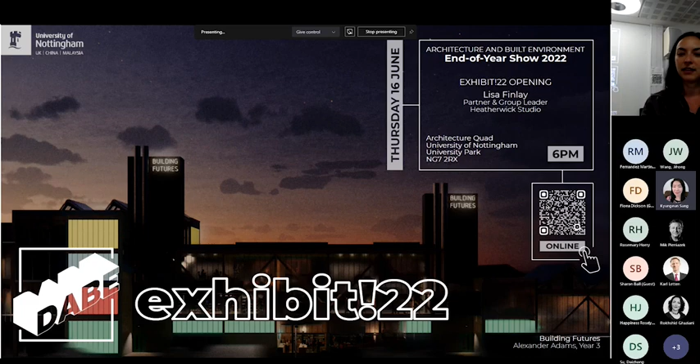Our exhibit for 2022 is online, so if you have a look at the kind of work that the students do—it's very much on city and building level, planning and design. I'm also deputy lead of the University of Nottingham Energy Institute, where that congregates often in energy research that's across the board. So we've just heard a mix of social science and technical backgrounds. The Energy Institute brings it all together to try to tackle the issues we face with energy, and particularly the aspect I work on is cities—the link between mobility and cities, energy systems, and the built environment. So that's me and my background.

I'll talk a little bit about the work involved here, but obviously it's not done just by myself, so bear that with me.

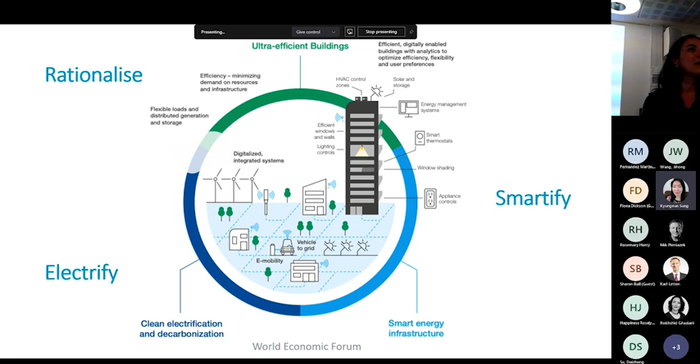I borrowed this graph from the World Economic Forum just to give some headings to the kind of work we do, because when we talk about decarbonizing cities, there's so much that could be done—everything we discussed today covers so many different subjects and areas. But very much we work on looking at ultra-efficient buildings, electrification, and smart infrastructure. So I made up some words there, but I think you know what I mean: rationalize, electrify, and smartify. Those are three areas that really summarize the kind of work we do to decarbonize cities.

So I'm going to start by giving you a couple of examples of the work on rationalizing. Based in Nottingham, as you heard, Nottingham was the first city to commit to carbon neutrality, with one of the earliest targets, 2028, which is really kind of tomorrow, isn't it?

The city took that ambitious approach because in the previous decade, 2010 to 2020, it achieved all its goals—which wasn't net zero carbon yet, but a significant reduction—6 years ahead of time. So the city thought, well, we can do this. But of course, a lot of the easy wins have already been won, and now we're into the difficult wins, which is where most of us are really, across the board—those little things.

So one of the hard wins is the housing stock, the existing buildings. Nottingham has about 164,000 homes, and 61% of those are below an EPC level of C—I think you're familiar with EPC levels, the colorful grading, so anything that's not green is bad, and there's a lot of not green. We assume on average each home would be releasing about 6 tons of carbon, which is the UK average for those properties.

We committed as a nation to bring all homes to EPC level C by 2030. I always smile when I say this because I live in a Victorian house—it's not going to be anywhere near C anytime soon, unless the government really wants to fund this with seriousness. If you have a privately owned property, you're very unlikely to get access to anything that helps you. Maybe some of you are in that situation too.

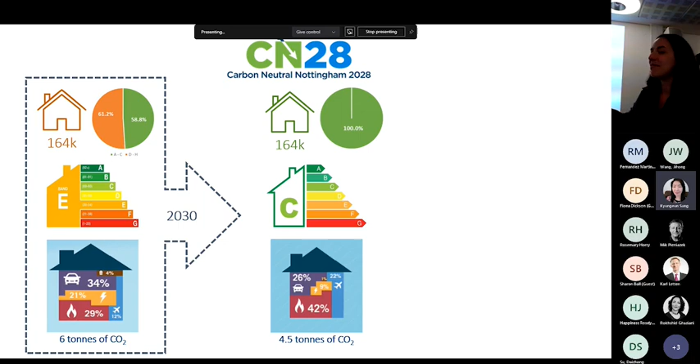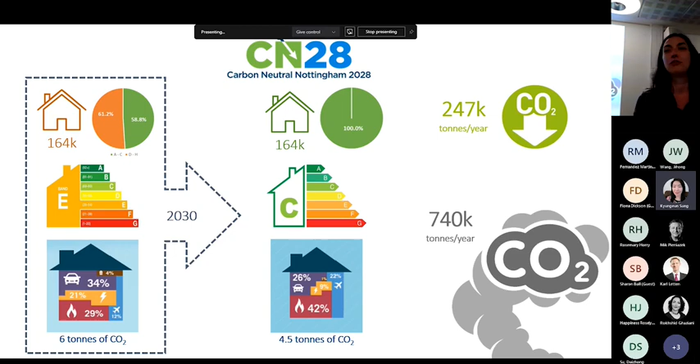Then perhaps the average tons per home will be about 4.5, bringing us to a total of about 740,000 tons of carbon per year, just from the existing housing stock, not the houses being built today, tomorrow, and next year, which are still being built to the previous building regulations, crazy as it sounds, even though new building regulations are coming up to be implemented by 2025, but which still isn't net zero carbon anyway. It's a crazy world, the built environment.

That's equivalent to about 740,000 hot air balloons, or about 74,000 hectares of trees, depending on what kind of tree you plant, and bearing in mind trees take 20 years - you'll hear from an ecologist later - to really start absorbing carbon. 74,000 hectares is 10 times the size of the city of Nottingham in area. That's for one year, just for the housing stock. There's no chance we can offset this.

There is a lot of work to be done on rationalizing, which is that first aspect I was talking about. So currently I'm running a project funded by the community renewal fund. Central government has given some local authorities money to run particular beneficial projects. Mine is one of four in Nottingham, looking at a carbon cost retrofit roadmap - retrofit strategies, the cost of each strategy, the feasibility of those strategies, and the payback both financially and in carbon terms, including the embodied carbon of the retrofit strategies.

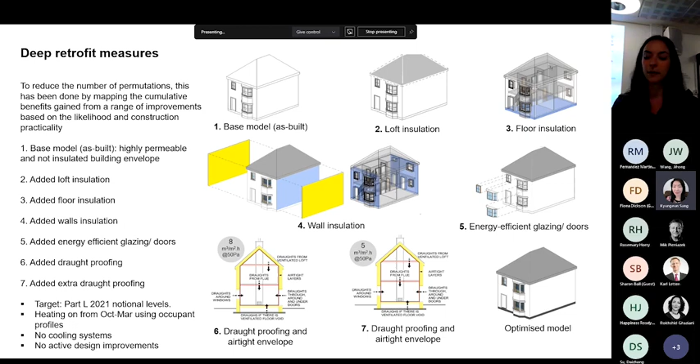It's a rather complex task. To give you a flavor of what that means: once a house is built, we start with the easiest things we typically do - loft insulation, floor insulation, possibly together since you normally get the same contractor. Then we think about wall insulation and windows. Then draught proofing to make it tight before thinking about renewables - air source heat pumps, PVs, and so on. That's the kind of thinking, and that's a flavor of how the outcomes look.

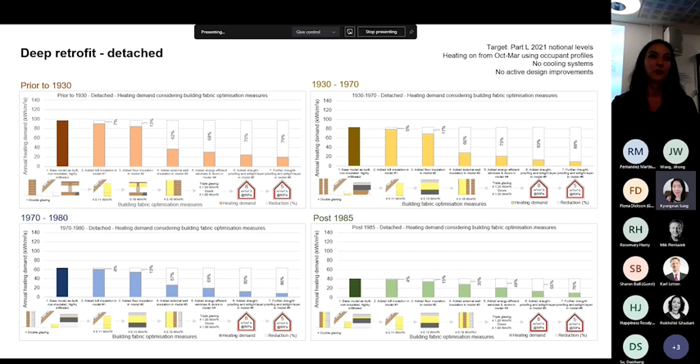The houses are separated by age and by fabric type. We looked at all the housing stock and tried to cover about 80% of it within our studies, then ran particular case studies significant to Nottingham - some of the tall towers will have to be retrofitted, and so on. You can see each retrofit strategy in each column. The graph on the top left shows homes built prior to the 1930s, then 1930s-1970s, 70-80, and post-85. Those time brackets mark significant changes in building regulations, so building fabrics are similar within those periods.

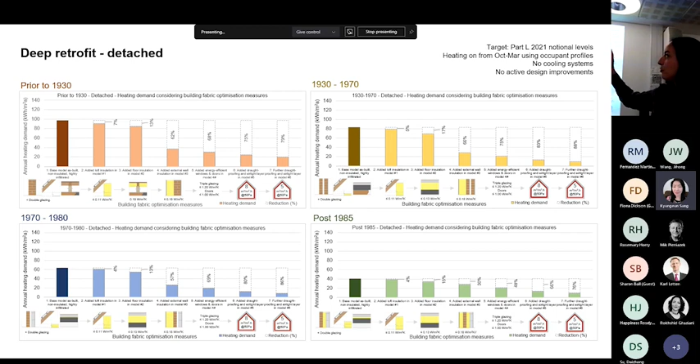So you can actually have a significant impact. If you're doing a deep retrofit - trying to achieve passive house type levels, really energy efficient homes - maybe a Victorian home like mine could get 79% reduction now in terms of energy use for annual heating demand, which is the majority of the energy use there. The newest homes are a much smaller proportion of the big picture, but it could still make a significant change.

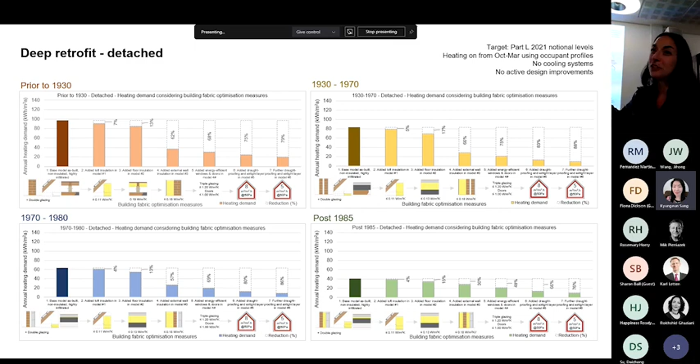However, I mentioned feasibility. A lot of what we're doing here is looking at what happens in real life. In real life, you would not retrofit 1980s homes - very likely you might do a little bit of something, but you're not going to make a full investment in energy efficiency in a home that's already fairly new. So typically that doesn't happen.

In older homes, some stages don't happen either. For example, retrofitting a Victorian house's floors - if it has one, you usually have about a third of the floor as suspended floor that you can insulate quite easily, but the rest goes directly into the ground, so that kind of thing doesn't happen either. Or externally insulating a home that has a cavity wall - you insulate the cavity, but extra insulation on the outside mostly isn't going to happen.

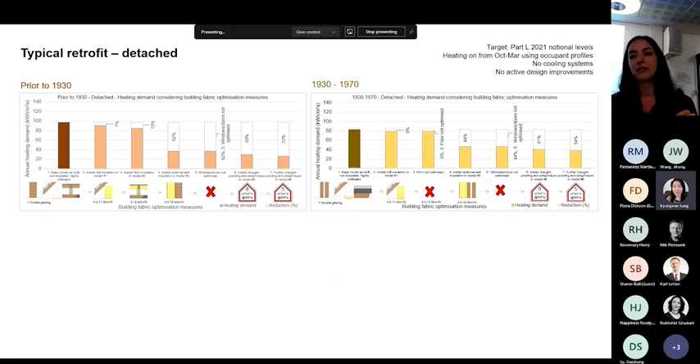So we're really looking at the feasibility of those strategies, and then the cost of each. Even though the government is talking about giving £5,000 per home to make homes more energy efficient, the cost we've observed so far - based on real life, not assessment - is about £70,000 on average to retrofit a social home, which is a very small property, and typically probably costs about that much to build in the first place.

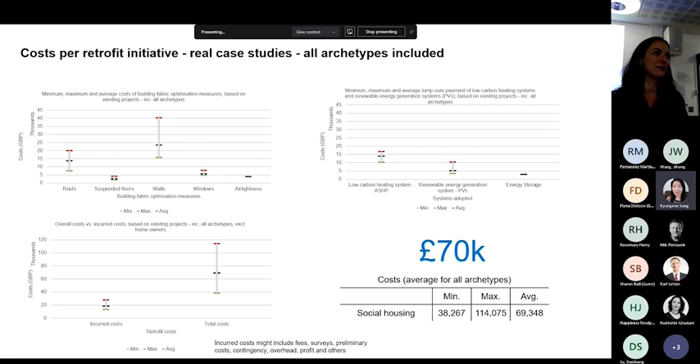And that's the cost of retrofitting on average. For a private home, it's at least £85,000, but there's a lot less data on privately owned properties, particularly with deep retrofit, because I don't know of many. In fact, I know of a couple, but not many in Nottingham either.

Then we looked at the benefits from a carbon perspective. The darker color is using gas for heating the home, and the lighter color is using an air source heat pump with a system efficiency of 3.35, a quite typical unit. You can see you save a significant amount of carbon by using electricity rather than gas, which is what we're looking to do now as we decarbonize electricity. So it's an easy thing to tap into.

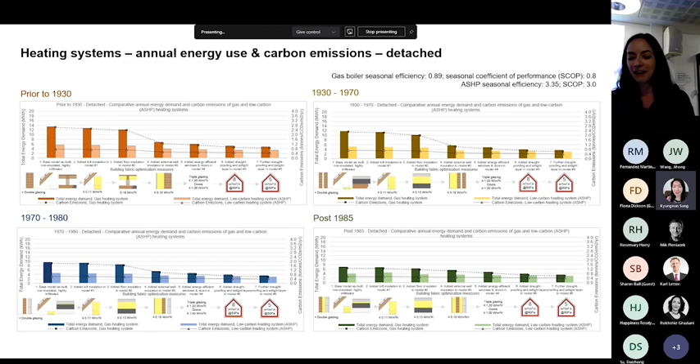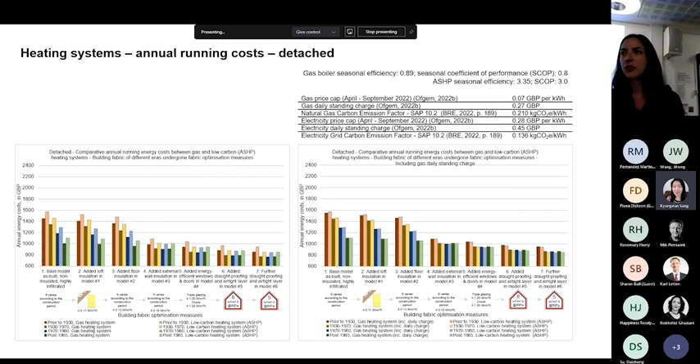However, when you look at the cost, and get into that area of electrification, it's actually going to cost a lot more to heat a home with electricity currently. The graph on the left doesn't take the gas standing daily charge into account, and on the right it does. So on the right you're about the same cost using electricity, while on the left you're paying a lot more. Also, heat pumps tend to run at low temperature, so if you have a really inefficient house, you're probably going to be uncomfortable anyway.

So this is hopefully going to help inform the government on some of the movements and investment in retrofitting existing buildings and homes in particular, because there's a lot of misunderstanding.

The reports commissioned by the government across the country talk about a full deep retrofit for about £15,000, with PVs for about £22,000 per home. If that was the real cost, we would have done it already. Everyone would have done it.

So I got into electrifying heat, which is one of the biggest swings we're going to see in the zero carbon agenda. How many minutes have I got?

Good, then. But there are other areas of electrification we need to look at. As we decarbonize electricity, we try to move more things onto that bracket. So we've been looking at combining mobility with the built environment and the energy system. I very much work in that middle ground.

This is one of the projects we've been running that's just finalized, called EV-elocity, looking at vehicle to grid, vehicle to building, or vehicle to X—vehicle to anything—charging and discharging. Essentially, this is bidirectional charging.

The thinking is, if you have a building producing and generating electricity, as most will have to do in the near future, why would you purchase a new battery for it if you already have to purchase an electric car? That's a battery—a really big asset. It's probably the most expensive part of your vehicle anyway.

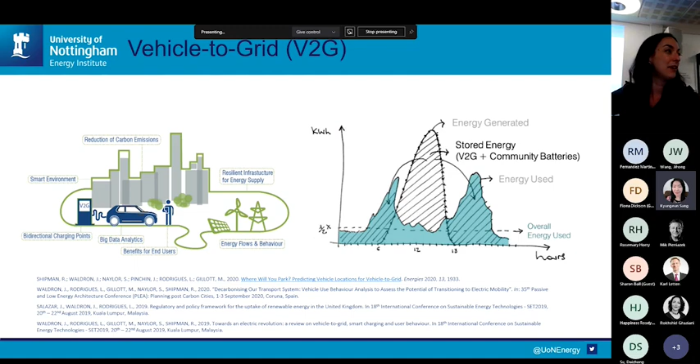If you can be clever about how to charge and discharge that, you can increase the financial benefits by sending energy to the grid, while also significantly reducing carbon emissions. Essentially, this project is about matching the demand for energy with the availability of charging from electric vehicles through bidirectional charging, and we installed a few of those across the board.

We have two at the University of Nottingham, and a few in Loughborough, Leeds, Worcestershire, and Warwick, which was one of the partners, with some battery work done in Warwick.

So you can see, this is my office there. That little house is a passive house, an operational zero carbon house that produces a lot more electricity than it needs. That electricity can go either to power the homes around it, the neighbors, or to power the car.

Our car is actually part of the study, so we drive on sunshine most days—we just charge on excess renewable energy, and that's all we use. So the thinking is, if we program when we park and plug it in, all it needs to know is when I want it to be charged.

The intelligence behind the system will think, actually at this moment in time you're better discharging because there's lots of demand, or at this moment you're better charging or storing and waiting until 2 in the morning.

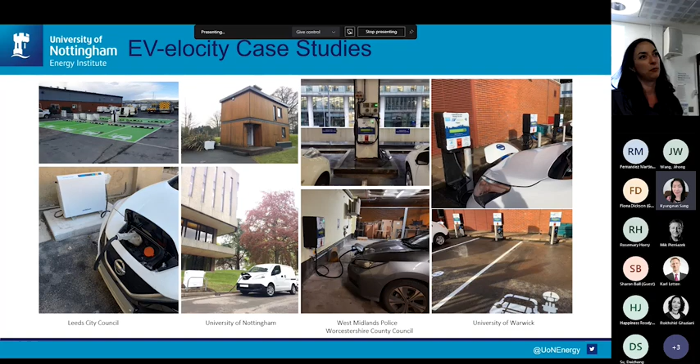Some fleets are really difficult to electrify, and that's not just the case at the University of Nottingham but everywhere. If you have home delivery services, for example, you don't want to interrupt your service in order to charge your vehicle. Or if you have a security fleet, you might be running constantly and need to be ready anytime to go out and reach people.

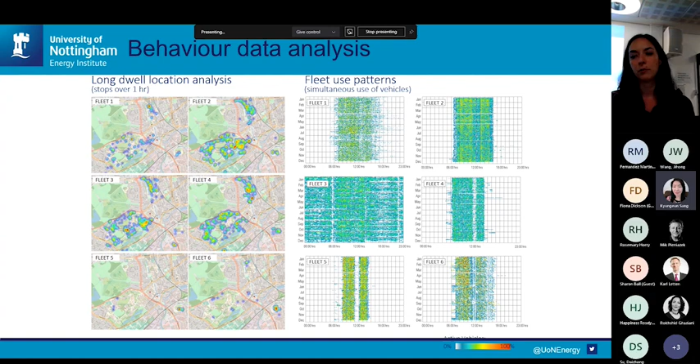This work really told us where we could optimize and where we had opportunities to charge and discharge vehicles. There's a lot of intelligence and machine learning behind this—not by me, because I'm not the intelligent one, but by the very clever people we hire.

You combine vehicle availability, meaning the needs of the users, with the battery state of charge and where it needs to be. Then the building energy consumption and production, and then you look at carbon emissions—the carbon intensity of the grid at those particular moments in time.

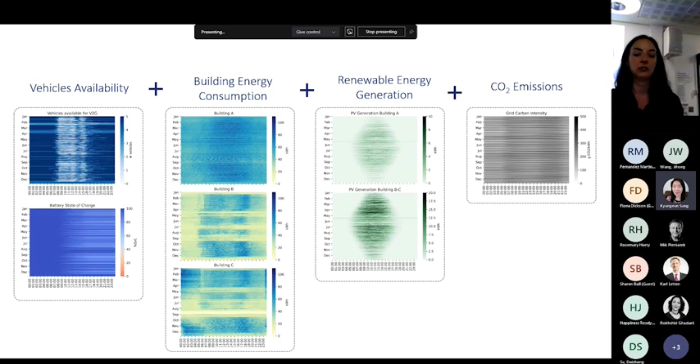By mixing all that together, you come up with something like this, that of course the user doesn't need to understand—the user just needs to plug it in. But the machine needs to understand that for this period of time, the vehicle is likely to be available for charging or discharging, so is it better to charge at this moment or discharge?

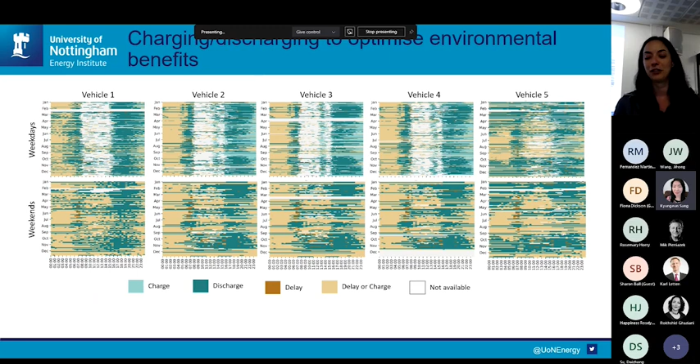We ask those questions based on, in this case, environmental benefits—I want to save the most carbon, so should I charge or discharge, and at what time should that happen? Or alternatively, I should save the most money. You just get those answers based on your need.

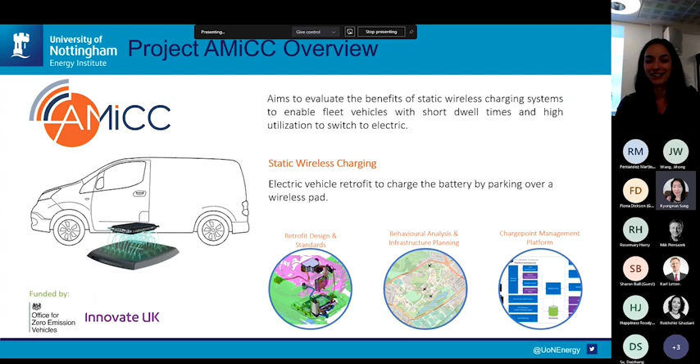Another similar project, but this time looking at wireless charging devices—quite new technology, quite a nightmare to get ready, installed and running. Probably the biggest part of the project was actually getting it on the ground.

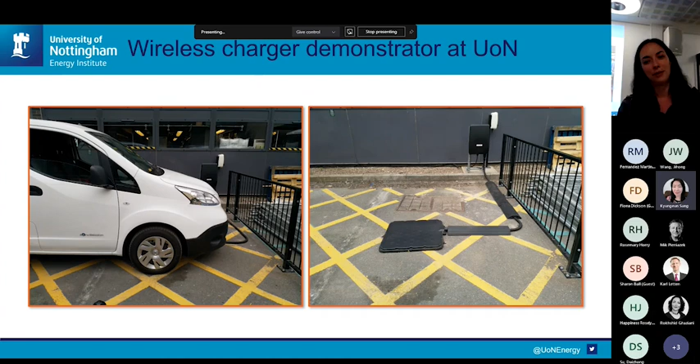Here is the University of Nottingham, and that's as sexy a picture as I could get of this—done by professionals as well, it's a hard one to make sexy. But the interesting thing is actually being able to deal with some of the fleets or vehicles that either have difficult accessibility or only have very small periods of time to charge and discharge—for example, when loading and unloading, or taxi ranks that are constantly moving a little bit further.

At the center of this there's again a lot of machine learning and algorithm development, to get all those different variables and put them together to answer the questions we need answering.

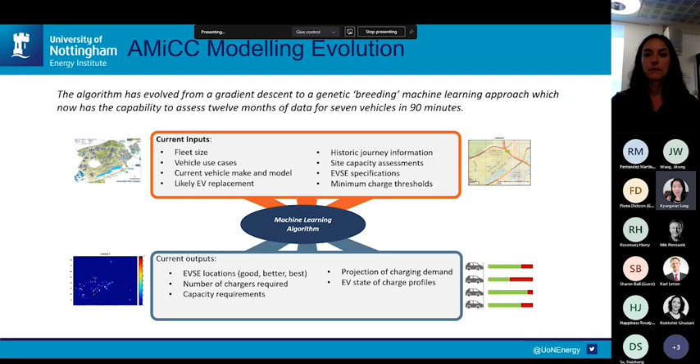That brings me to the next bit, which is where I'll finish, looking at smartifying. I appreciate that's not a word in English, but I think it should be—English isn't my first language anyway, so I'm fine with making them up.

By smartifying, I mean understanding and collecting data that allows us to understand what the problems are, what data we lack that we could collect more of, being able to install monitoring control systems, and being able to tell people what's best to do. For example, on campus, being able to tell someone that if they walk, it'll take that much time and improve their health by that many points, while if they take public transport, that's how much carbon emissions they'll release.

And if you're cycling or you actually bring your private car, so you have an element of comparison and engaging people in that process.

For those who have met us before, you've probably seen the Creative Energy Homes - that's my office in there. This is 8 energy efficient homes on campus that we use as part of our research. They're occupied either as offices or homes, and they have various levels of energy efficiency, connected as a smart micro grid with heat and electricity. That enables us to test all those different ideas on the ground, on campus, in an environment that is safe and controllable before we go out into the real world.

Such as through Project Sensible, where we installed this kind of technology and thinking in community energy - just heard about community energy a minute ago - in a real life community, engaging real people with the buildings that are there.

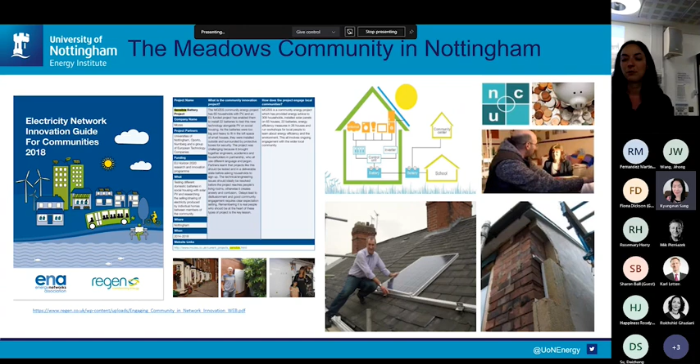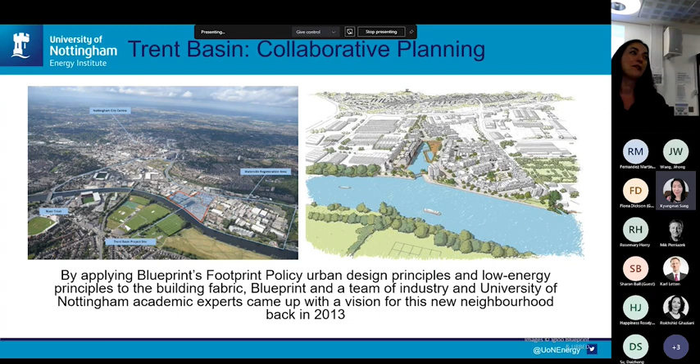Similarly, another European project led us to develop the vision for the Trent Basin. Some of you have actually been in some of the events we organized through the work on Trent Basin. This was a lot of collaborative planning, working together - planners from the city, developers, investors, university academics - to try to put a vision down for something which was a completely derelict industrial site, to turn that into a sustainable housing development.

And further than that, when we're pushing the boundaries with developers and saying we must go net zero, they'll come back and say we can't afford it - it's a difficult site, we're not going to sell these properties, they're getting too expensive. So I say, okay, you do the houses as good as you can, and try to combine them into a community energy scheme. So if you don't have enough roof in your property, you can benefit from the roof of your neighbor, because everyone's benefiting from the assets together.

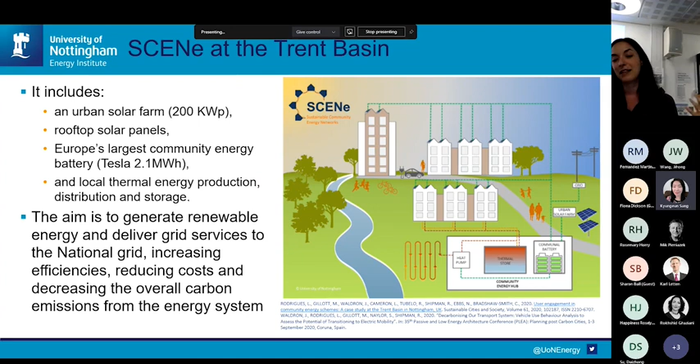And that's what Project Sensible was - the largest community battery in Europe, a PV farm on the derelict sites, which are now moving on to the buildings as the building is being built. And again, a lot of intelligence on thinking how that could be delivered.

So we have a digital twin that can be accessed online, so you can have a look at the energy flows and the building use. We have a physical community hub where people can come together, and there was a lot of actually promoting a community form in an area that had no community, just disjointed buildings. And a lot of intelligence to prompt you - we have voice-activated systems to actually tell people your energy use today is a lot higher than last year, so something is going on that you could do better.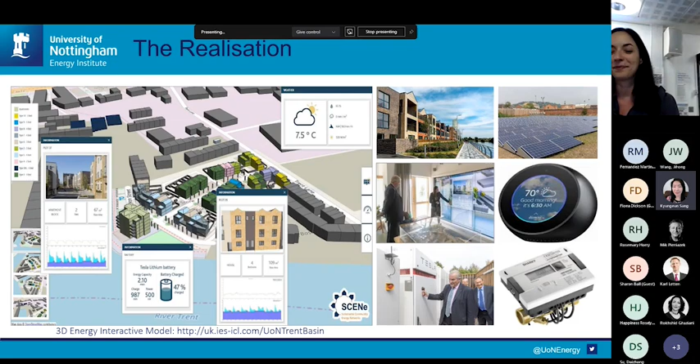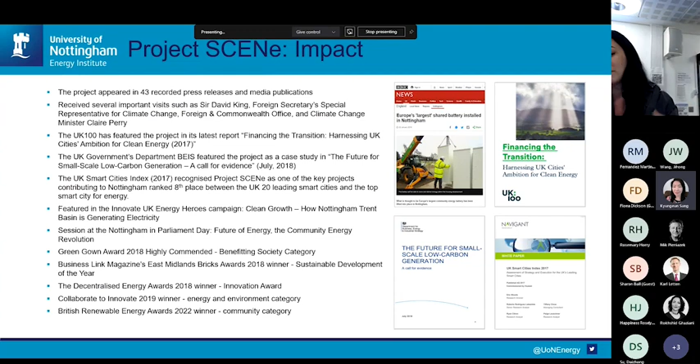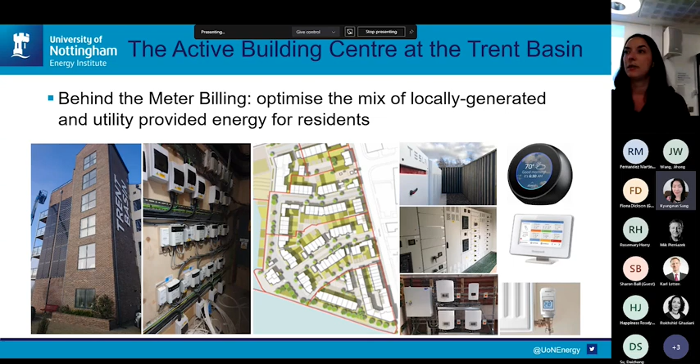We just got a new award for this project, so this slide has lots of awards and government documents where we have made a real impact and generated some real outcomes. But importantly, we got further funding to continue the work there, to look at the benefit from the user side in terms of the mix of using locally generated energy, or actually providing grid services and then having a payback as a financial benefit.

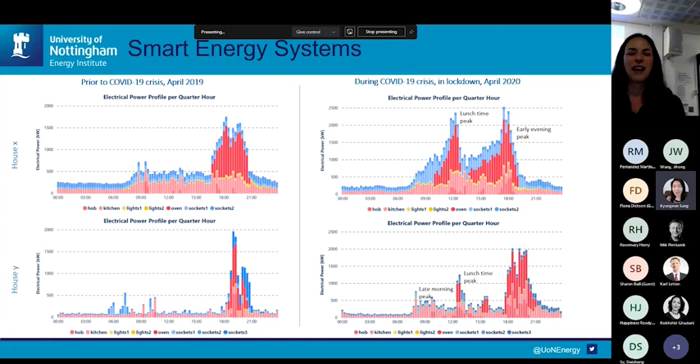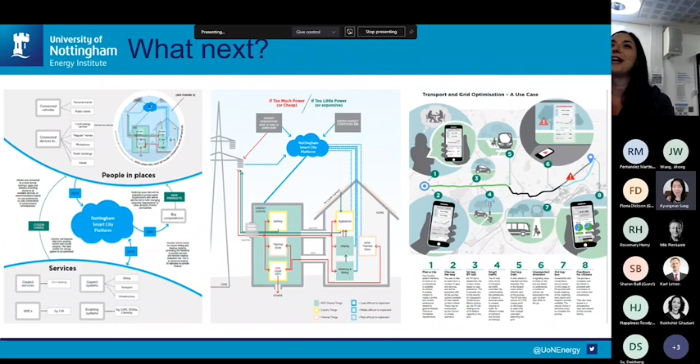So I think thinking about net zero cities and that proposition really has to take into account resilience to things such as the pandemic - it could be something else, it could be a new pandemic - but our systems need to think ahead of time and be ready for that. The next stage of this, we are building a bigger digital twin of the whole city. We're building it on the campus now because we have lots of data, and then transferring that to the rest of the city, where we can start looking at mobility and energy issues first before we can move on to other aspects. Thank you.